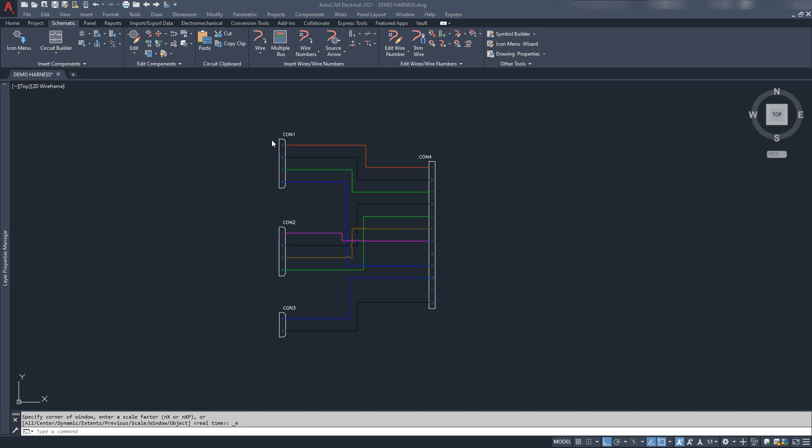Okay, this is pretty much unrehearsed, but hopefully it will give you a fairly good idea of how to use the schematic side of things, or the electrical harness side of things, in Inventor Professional. So you can draw this out on a piece of paper. I usually just draw out my harnesses in AutoCAD Electrical. Just makes things easy, keeps it tidy, but I've done the same thing from hand-drawn sketches. It really doesn't make too much difference.

So I've got here, I've labelled my connectors, Con 1, Con 2, Con 3 and Con 4. It's just a very, very basic harness, and it should give you a fairly good idea of how to go about making something that's much larger.

Now, I've never had much success with using the Inventor AutoCAD Electrical connectivity. Probably haven't invested enough time in it, but I found that it was very difficult to set up, because some of the jobs that I've worked on, I've had between 3 and 6 harnesses in a single job, and AutoCAD Electrical didn't really seem to want to connect with those, so I've just usually gone and just drawn up the harness, and here I'll usually get the wire information and just add it to the connector information so that I know what wire number and color I'm using.

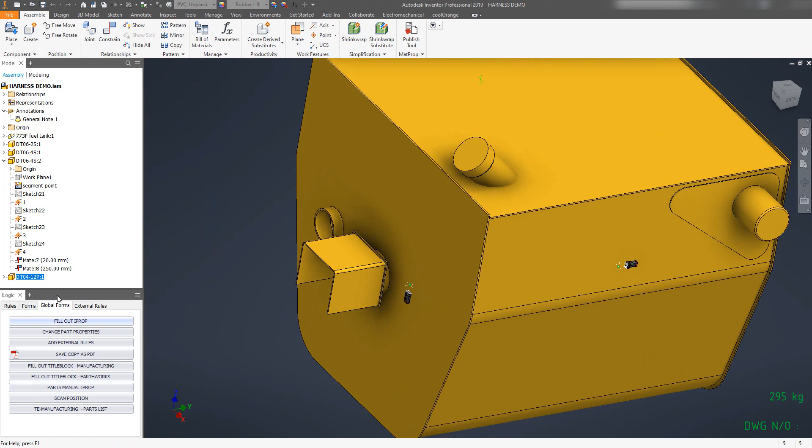But we'll just flip over to Inventor now, and I've got a harness demo assembly here with just an earth moving mining truck fuel tank, and it's purely just as some geometry. So here is my 12-pin Deutsch connector. I've got a 2-pin over here, and I've got a 4-pin and a 4-pin, and if you take a look back at this, I've got 2 4-pin connectors, a 12-pin and a 2-pin.

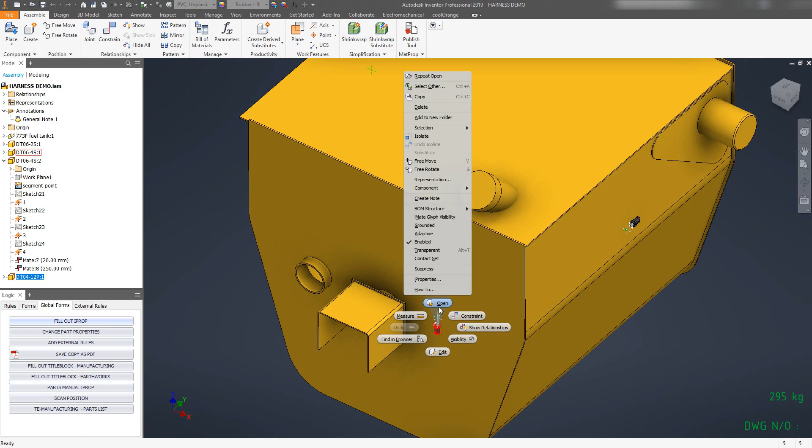So the first thing you want to do is place your connectors, but before you do that, if you have a connector drawn up, you can see here I've labelled all of those. What you need to do is actually publish this, not necessarily to the content center, but you have to create a connector component. And if you go to your drop down menu here, just make sure the harness checkbox has got the tick next to it, because then you can add pins to your connector.

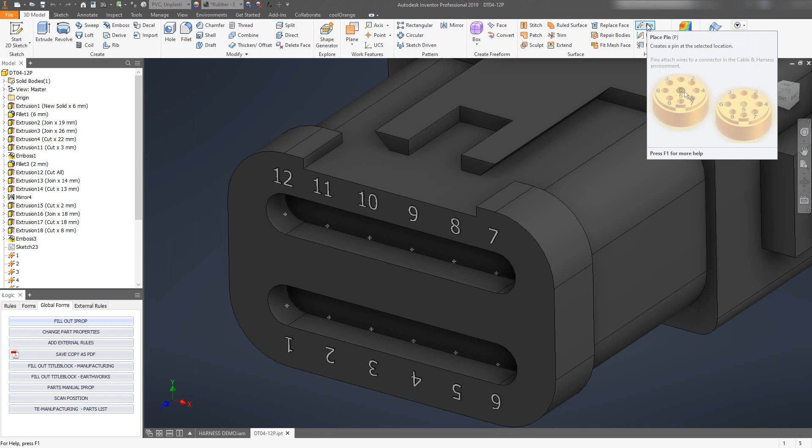So if you click on the pin, and you can click on points, you can see there it's coming up there, it would give me an extra pin, and you can see here that I've just got all my pins labelled here, and they just correspond with the numbers. And you can see what I've also done here is just an offset from the end of the connector.

This is where I'm actually going to end my conduit, and then the wires fan out, pretty much like if you have a harness manufactured. That's what you'll see, is the braid that holds all the wires together will sort of end a little bit short of where the connector is, and then the wires will come out, and then generally they'll put a rubber boot or something between the two to help waterproof it.

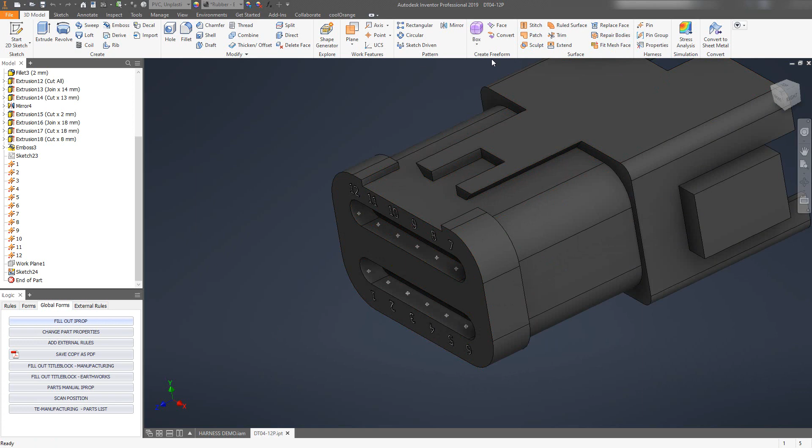But once you've got your connector harness pins there, you then have to go to the Manage tab, and just here you have to author a connector.

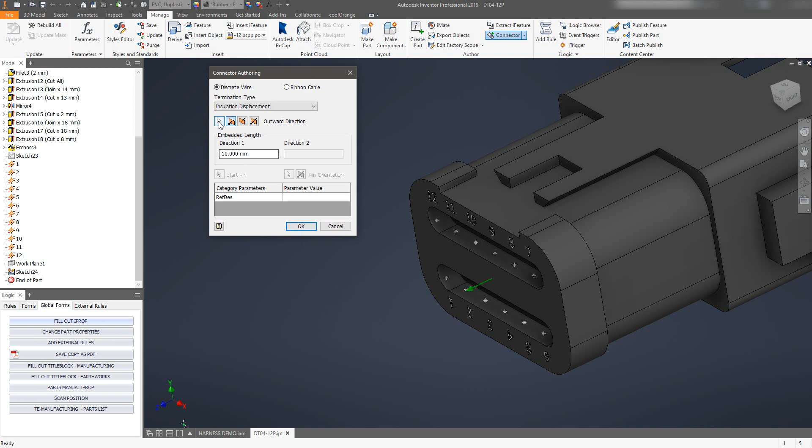And I've just got here the direction the pins are coming out, or the wires are coming out, is out this way, because with this sort of connector, the wire actually goes into the connector and then it's fixed, so I've just said that it's got 10 mil of embedded length, but you can mess around with that. If you just select this face, go to this point here and click OK, then you get that message, and that way you can use the parts in the electrical harness. So I'm just going to close that.

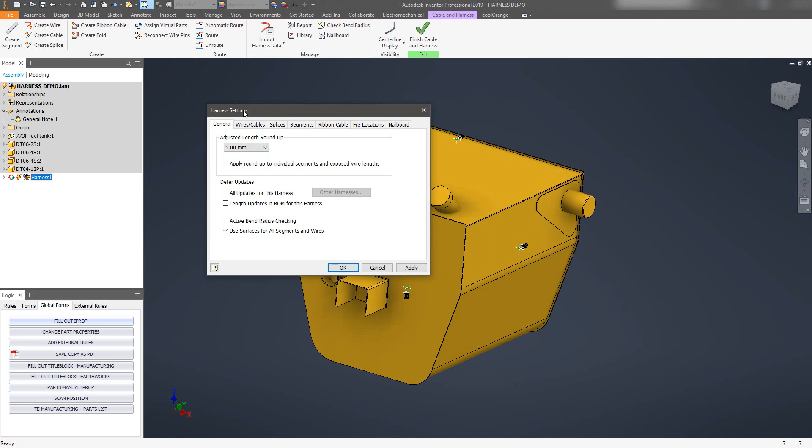Now I have made this quick assembly and I've saved it. Next thing I need to do is go to my environments and select cable and harness. That's going into the correct folder, so I click OK. Now if you go here, right click and say harness settings, and wire roundup. Usually I've used fairly large harnesses, so I select about a 5mm roundup. It just keeps everything nice and even when you go to make your nail board drawing.

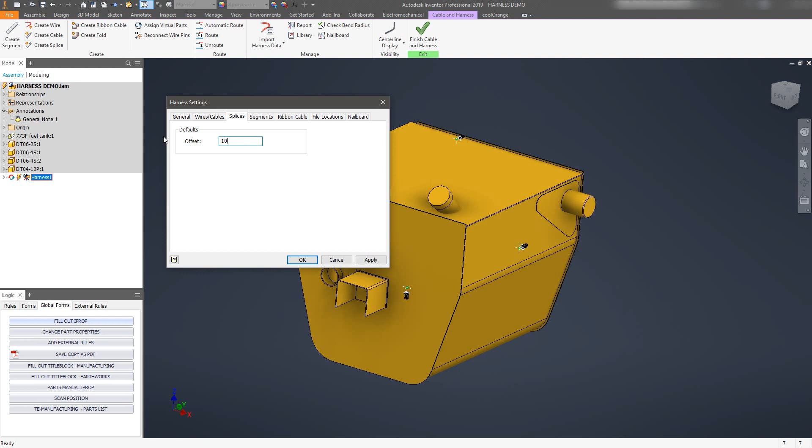Wires and cables. I usually like to have everything set so that it sort of looks about the right size. Curvature, natural curves. Splices, we'll make that 10, and it's just an offset. If you put a splice in, you can select a bit of geometry and it'll just offset the splice from that. Settings, segments, again, we'll make that as rendered. Offset, we'll make that 10mm, and again, you just redefine your segment node and it'll offset it from whatever it is you're trying to wrap it around.

And if you want to change that, I'm just going to choose a color here. We'll make it violet. Ribbon cable, we're not using that.

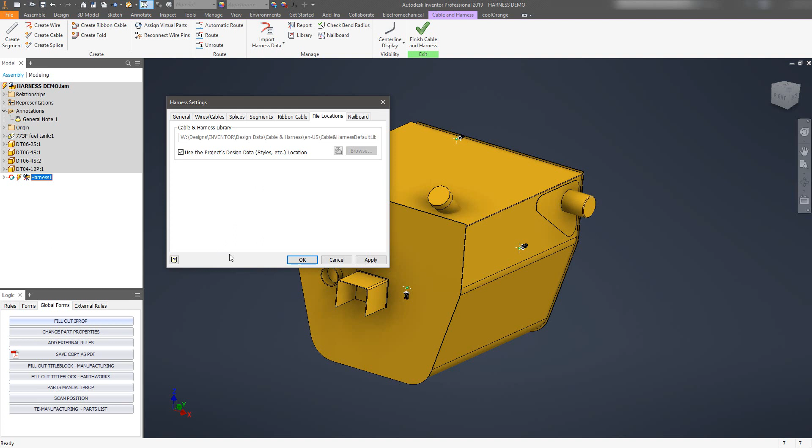File locations. By default, this will want to go to the public folder where your design data is set, but I once lost a lot of information after a computer was stolen, and I was using all the default settings with Inventor, and I didn't have my cable and harness information in my main workspace. It was still in the public folder, and luckily I had a backup that had some of the information. It didn't collect the wire library, so whilst the model file had all the wires, it had no wire information, and it took about 8 hours to open the model file, and all of the wires were default thickness, default information, so I lost a lot of time and work on that.

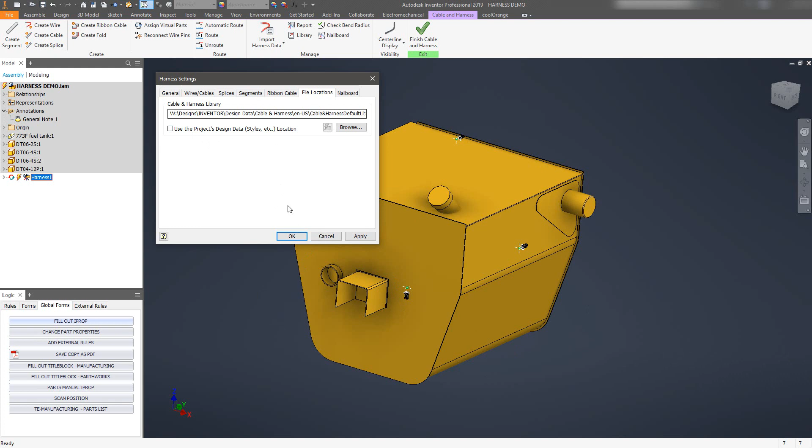So usually what I'll do is copy my design data into my workspace and map everything so that all my file paths point to the design data in the local workspace, so it gets backed up. So I can just browse here, workspace, and I believe it is in the wire settings. I made a copy here as a backup, but I've also made my own wiring library here just by editing the file once it gets in. So I'm just going to click OK on all that.

And now if I go to create a wire, you can see here TE, and then here's all my wires. Now you can actually edit the library by clicking up here, and if I want that, I can even copy that. I can then double click and start to edit any of these properties, colors, whatever you like, to add wires to your collection.

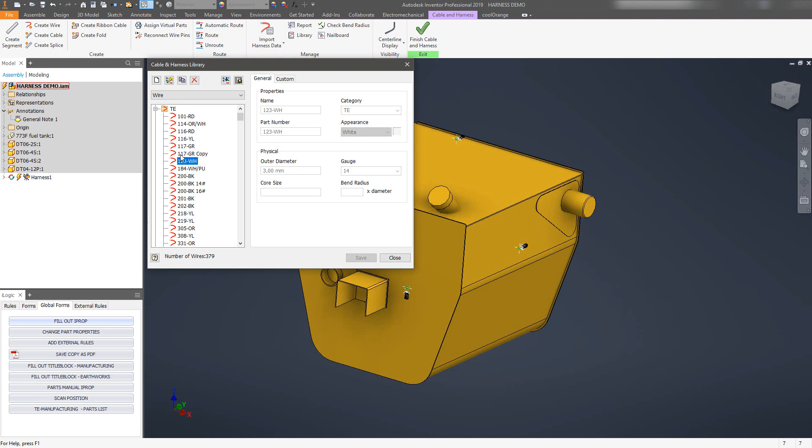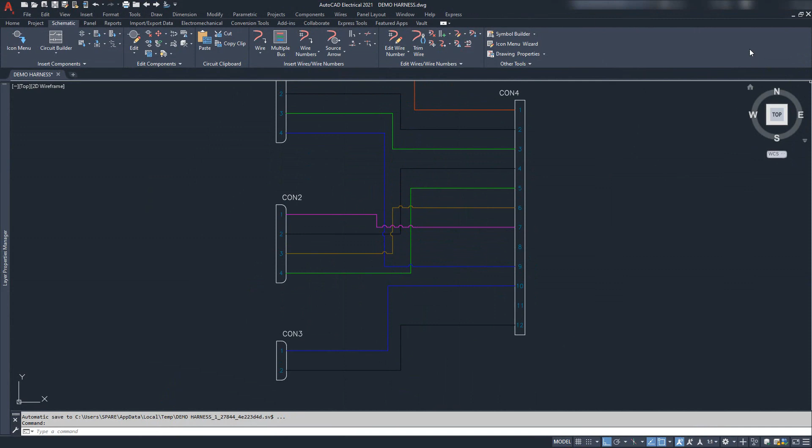So that is basically the first setup for getting the harness prepared to take it from AutoCAD Electrical and replicate that in Inventor so that you can make your nail board drawing and run the harness.